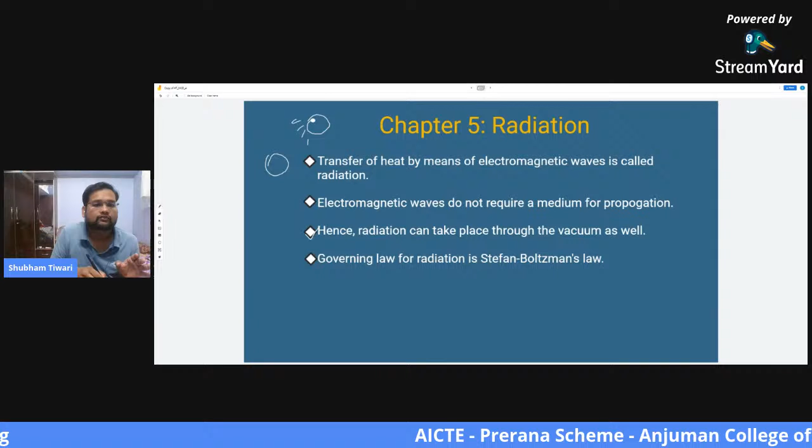What is radiation? Radiation is the transfer of heat by means of electromagnetic waves. Electromagnetic waves are not mechanical waves like sound waves. Sound waves need a medium to propagate and have different speeds in different mediums. However, electromagnetic waves do not require any medium to propagate. Hence, radiation heat transfer is the only mode that can take place through vacuum, and this is the mode of heat transfer responsible for propagation of heat from sun to earth.

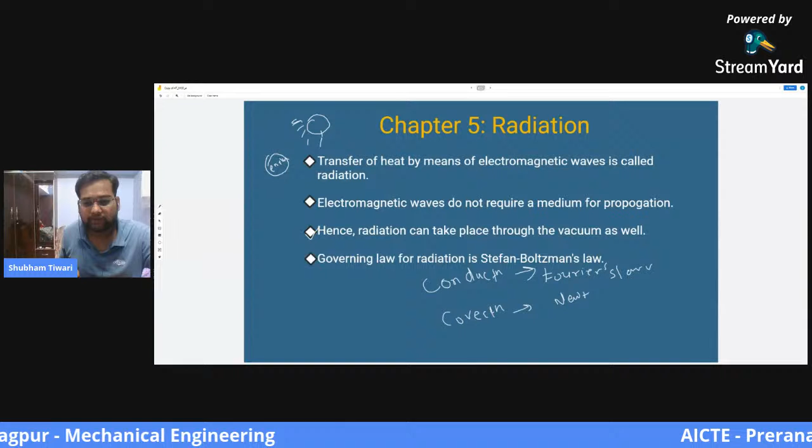For conduction, it was Fourier's law. For convection, we had Newton's law, and for radiation there is a law called Stefan-Boltzmann's law. So let us start the study of radiation with its governing law.

The Stefan-Boltzmann law states that the radiation energy emitted from the surface of a black body per unit time per unit area - heat energy is what we are mostly concerned with in heat transfer - per unit time per unit area, measured in joule per second per meter square, is a quantity known as emissive power.

Why do we need emissive power in the first place? Because let's suppose we are talking about the sun. Sun is a very huge entity, so it has a big surface area. We won't be receiving energy from all of its surface area; the earth may receive from a particular surface area. So what we need is an average value of how much the sun is emitting from over a distributed surface.

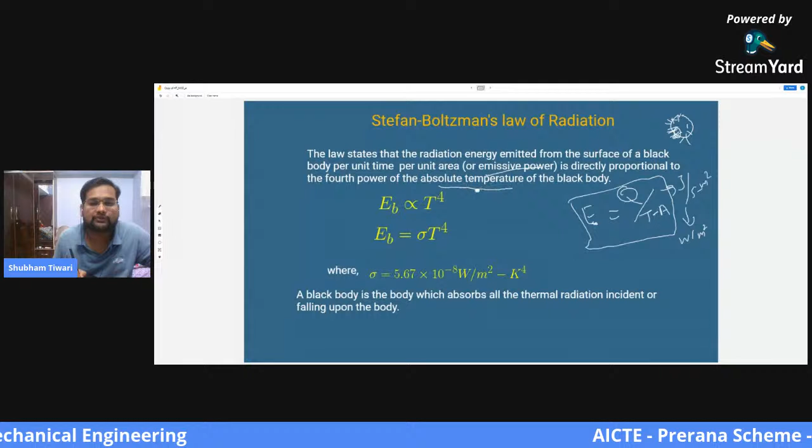The Stefan-Boltzmann law says that the emissive power of a black body - I will explain what a black body is, as we have studied this in school - is directly proportional to the fourth power of the absolute temperature. Absolute temperature is temperature measured in Kelvin. So EB is directly proportional to T to the power 4, where T is measured in Kelvin.

To remove the sign of proportionality, we introduce a constant of proportionality, sigma, known as Stefan-Boltzmann's constant. Its value is 5.67 into 10 raised to power minus 8. By rearranging, we find its unit is E upon T to the power 4. Since the unit of E is watt per meter square, the unit becomes watt per meter square Kelvin to the power 4. So Stefan-Boltzmann constant has a value of 5.67 into 10 raised to power minus 8 watt per meter square Kelvin to the power 4.

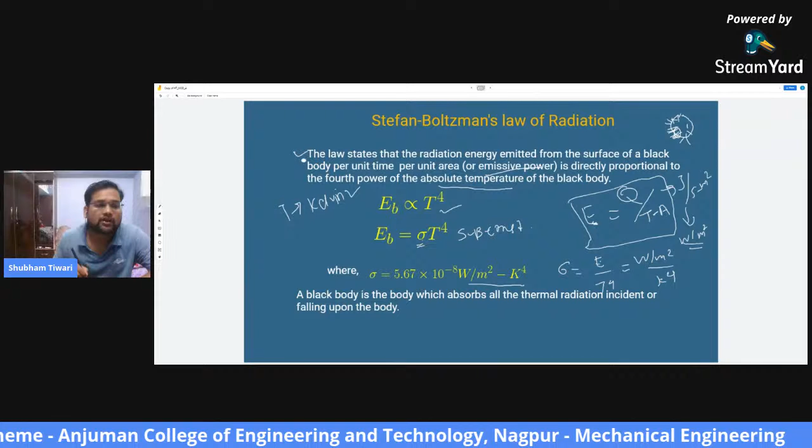Now, what is a black body? We came across this terminology. Suppose I have a body here, and some amount of heat energy is incident upon this body. If this body absorbs all this heat energy, then this body is known as a black body, or a perfectly black body. A black body is a body which absorbs all the thermal radiation incident or falling upon it.

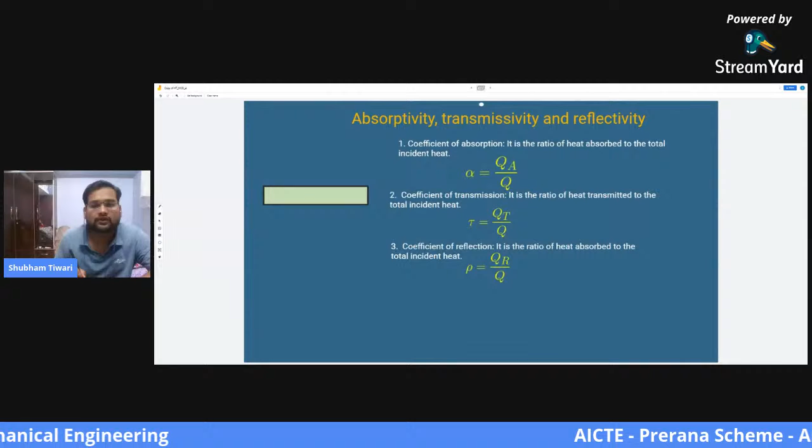Now we have to look at some terminologies, including absorptivity, transmissivity, and reflectivity. Suppose I have a body here, and some amount of heat is incident on this body. Q is the total amount of incident energy.

Incident radiation, heat radiation, or thermal radiation - terminology is quite mixed up, so don't get confused by whatever we are talking about. Radiation is thermal radiation, which is nothing but the heat energy that has been radiated.

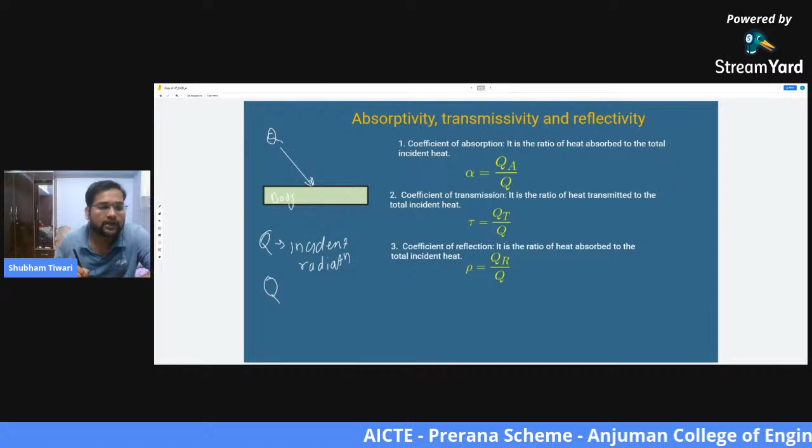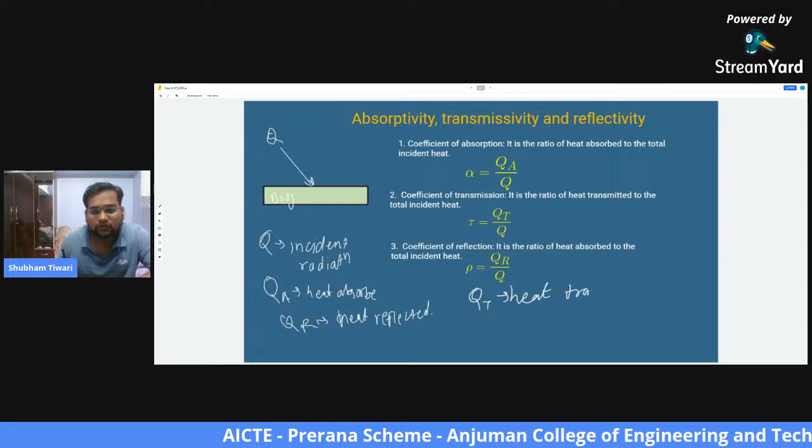QA is the amount of heat absorbed. QR is the amount of heat reflected. And QT is the amount of heat transmitted.

Now what happens to this body? Some amount of heat energy is absorbed within the body - that is QA. Some amount of energy is allowed to transmit through itself - that is QT. And the remaining amount is reflected. So when total amount Q of incident heat radiation falls upon this body, some of it is absorbed, some of it is reflected, and some of it is transmitted.

So let us keep this in mind and jump to this terminology. The very first terminology here is coefficient of absorption. What does it say? It is the ratio of amount of energy absorbed to the total incident energy. So let's say if the incident energy was 100 watts, and this body absorbed 60 watts of energy, then alpha will be 60 upon 100, and its value will be 0.6.

Now coefficient of transmission - it is the ratio of amount of heat transmitted to the total incident heat. If incident heat was 100 watts, absorbed heat was 60 watts, and transmitted heat was, let's say, 10 watts, then it will be 10 upon 100, which equals 0.1. The value of tau here will be 0.1.

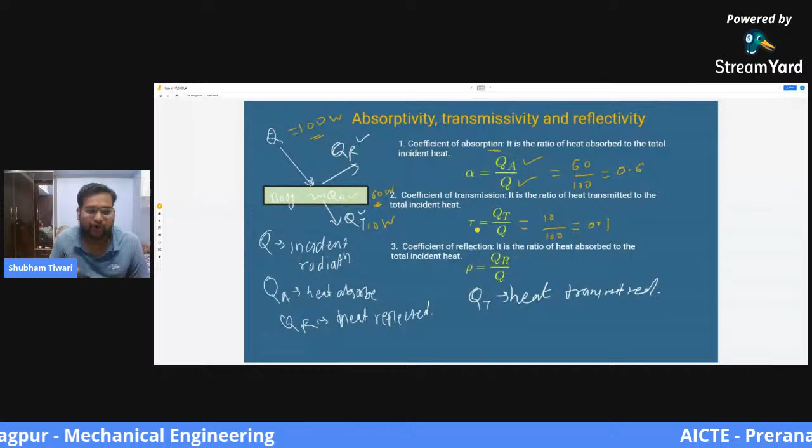Now again we have QR, the amount of heat that is reflected. So out of 100 watts, 60 watts was absorbed, 10 watts was transmitted, so the remaining 30 watts is reflected. So amount of energy reflected divided by total incident energy is 0.3. This is coefficient of reflection. It is very easy to remember - if you just remember these equations, you can easily recall its definition.

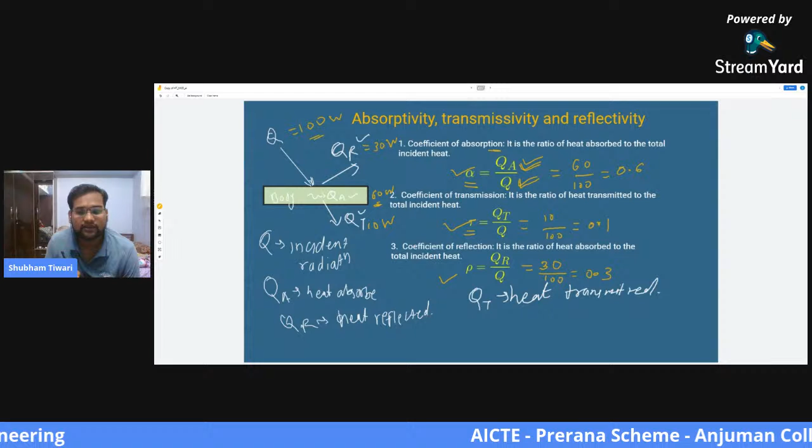Alpha is the ratio of heat energy absorbed by the body to the total heat energy incident on the body. Transmissivity, or coefficient of transmission, is the ratio of amount of heat transmitted to the total amount of heat incident on the body. Reflectivity is the amount of heat reflected to the total amount of heat incident on the body.

So let us just move further and continue this discussion about these coefficients.

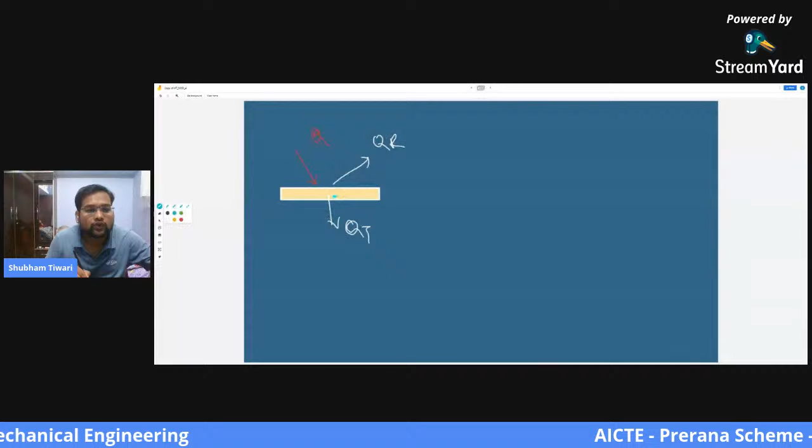So as I told you, Q is the amount of heat that has been incident on this body. QR is reflected. QT is transmitted - the amount of heat transmitted. And QA is absorbed within this body.

So total energy equals energy absorbed by the body plus energy reflected by the body plus energy transmitted by the body. Now what I will do is divide the above equation by Q itself. By rearranging, I can write QA upon Q plus QR upon Q plus QT upon Q equals Q upon Q.

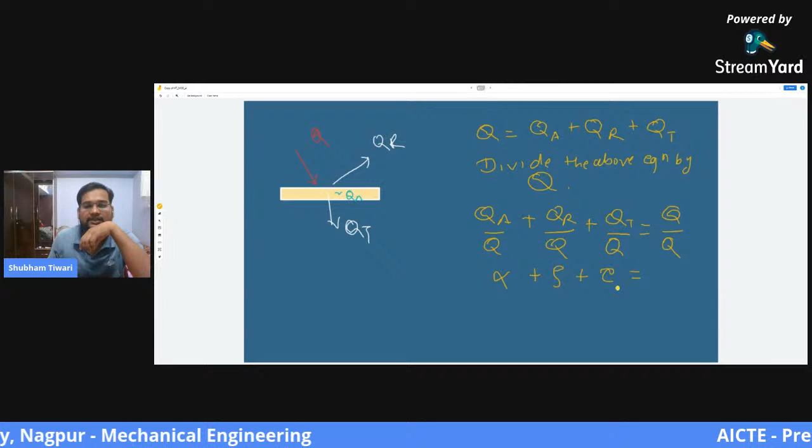What is QA upon Q? If you decipher this equation, it is heat absorbed upon total heat, that is absorptivity. Heat reflected upon total heat, that is reflectivity. Heat transmitted upon total heat, that is transmissivity. And what is Q upon Q? It is 1. So this is a very important equation we have achieved: the summation of all these coefficients - coefficient of absorption, reflectivity, and tau - equals 1.

Let us now check this equation with various cases. What is our equation? Alpha plus rho plus tau equals 1.

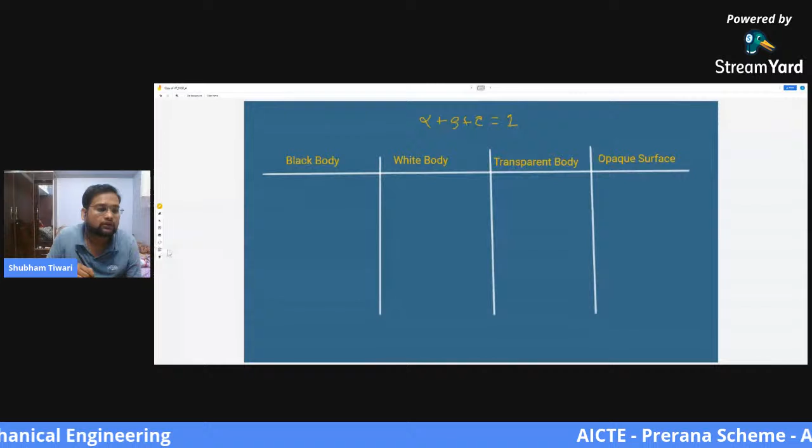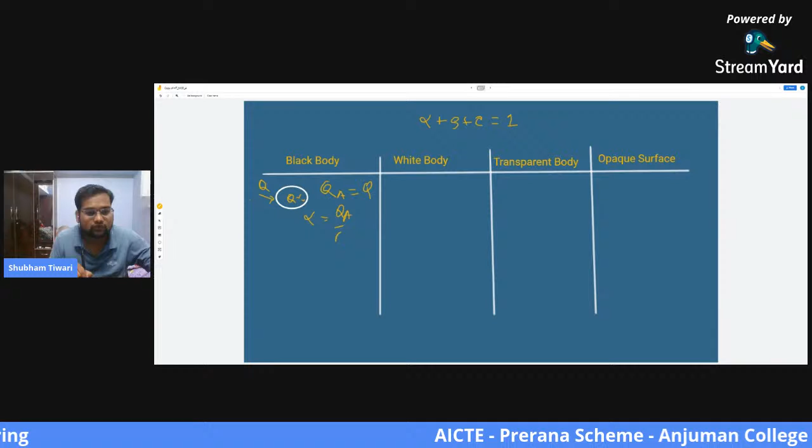First let us see black body. What will a black body do? If Q is the amount of energy incident on it, it will absorb all the energy within it. So we can say QA equals Q. So alpha, which is QA upon Q, becomes 1. If alpha equals 1, then in this equation alpha plus rho plus tau, we can say rho equals 0 and tau equals 0, because their combined summation should equal 1. Since alpha takes the value 1, the remaining two will have value 0, as they can never have a negative value.

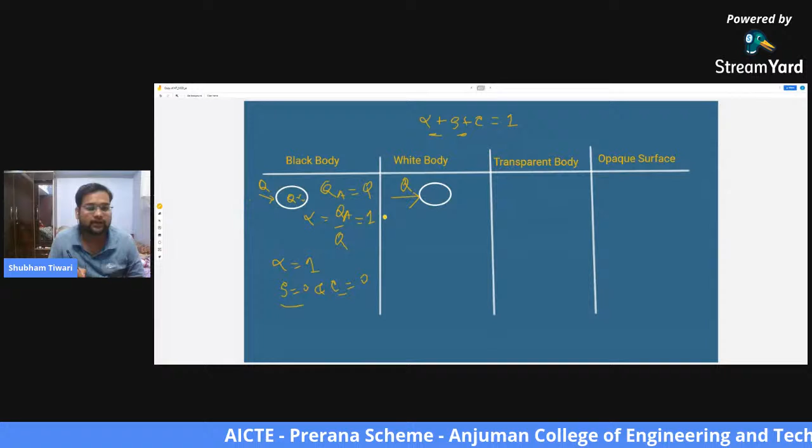Now let us see what happens with white body. When Q amount of heat is incident upon it, what this white body will do is reflect the same total amount of energy that is equal to the incident energy. That is, we can say QR equals Q. Now rho is QR upon Q, which equals 1. Since rho takes this value, from this equation we can say alpha equals 0 and tau equals 0.

Now let us move toward the next term, that is transparent body.

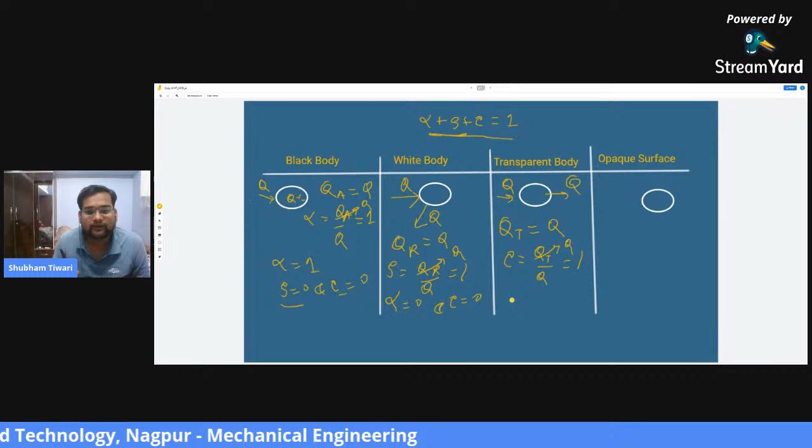Now in a transparent body which is not absorbing any heat, we can say that if Q amount of heat is incident upon it, then the same amount of energy will be transmitted through it. So Qt equals Q, and tau becomes Qt upon Q equals 1. So the remaining values of alpha and rho will be equal to 0.

Now let us see what an opaque surface is. An opaque surface is a surface which won't transmit any heat, that is Qt equals 0 in this case. So the energy is either reflected or absorbed by the body. So Qt equals 0 means tau, that is Qt upon Q, equals 0. So from equation 1 we can write alpha plus rho equals 1. This was the discussion about different types of bodies that we come across in radiation heat transfer.

Now, Planck's law of thermal radiation. This is a law related to the nature of waves. One must remember that this heat transfer is special because it takes place by means of electromagnetic waves. Since we are talking about waves, there will be terminologies like wavelength, amplitude, etc. that come into play when talking about this type of heat transfer.

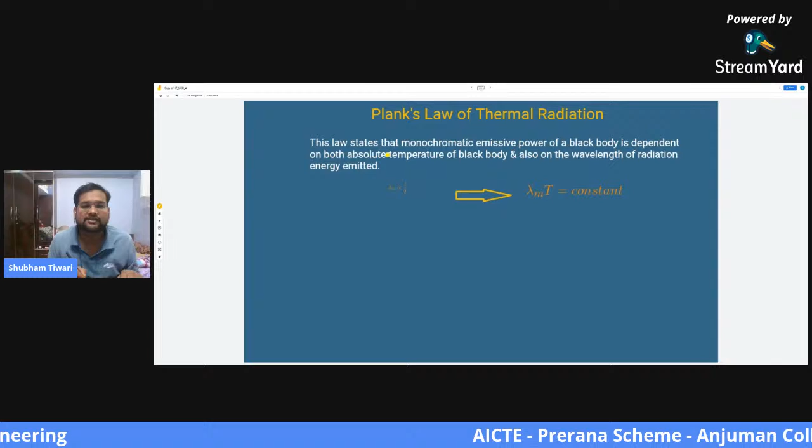So what does this law state? Let us quickly read it. This law states that the monochromatic emissive power of a black body is dependent on both the absolute temperature of the black body and also on the wavelength of radiation energy emitted.

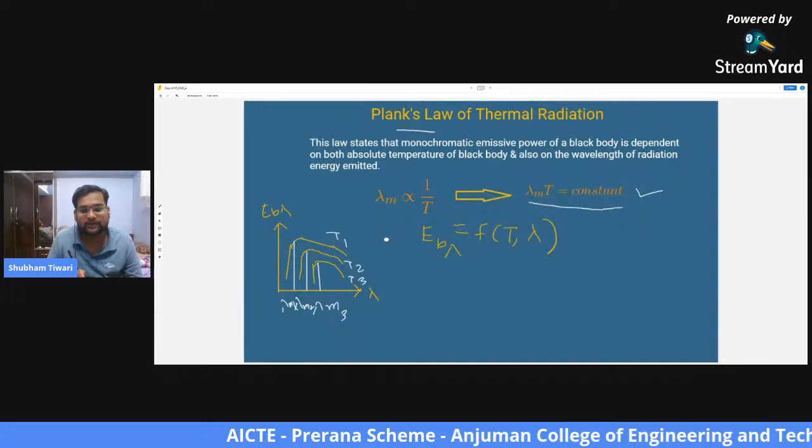What is the importance, and if you want to remember it, what you have to remember is just this statement, just this expression: that EB lambda is a function of absolute temperature and wavelength.

Now, emissivity. There is this term known as emissivity. Emissivity of a body is defined as the ratio of the emissive power of a body to the emissive power of a black body.

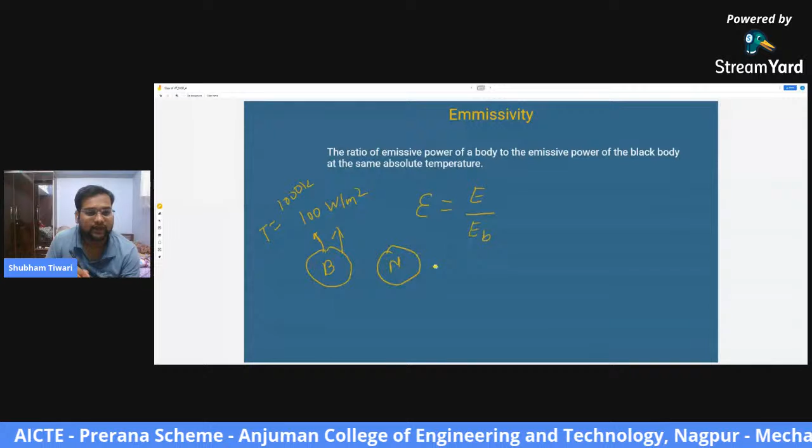Let us understand this with two bodies: one is a black body, one is a normal body. This body has an emissive power of 100 watt per meter square, at a temperature of let's say 1000 Kelvin, which is just an assumption, not the exact value. At the same temperature, the normal body has an emissive power of 70 watt per meter square.

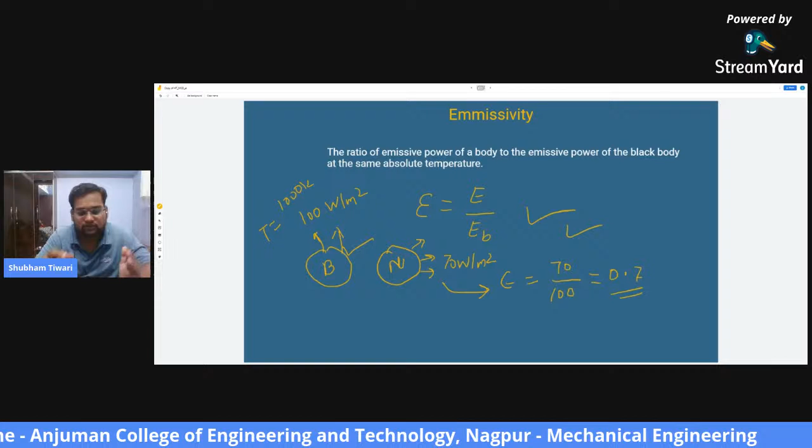So what is the purpose of emissivity? Emissivity is nothing but a standard of comparison. So in any case, when we need to evaluate something, we have to set a benchmark for comparison. Black body is that benchmark which we compare any body with. So emissive power of any body can be compared with the emissive power of a black body by means of emissivity.

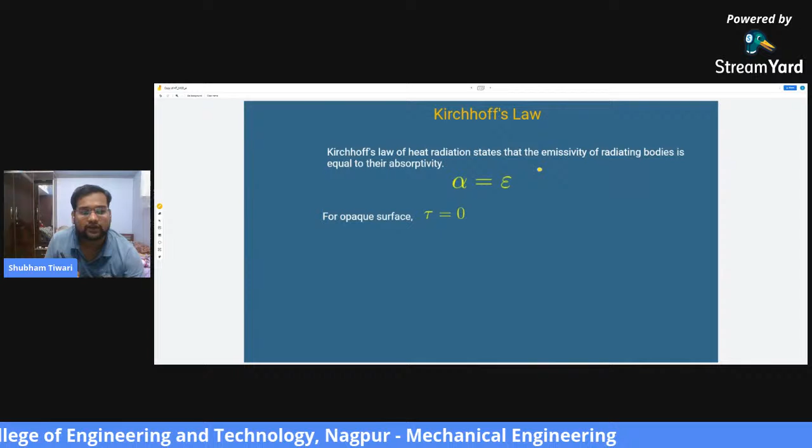Now, another law in this radiation chapter that we have also studied in school is Kirchhoff's law. Kirchhoff's law of heat radiation states that the emissivity of radiating bodies is equal to their absorptivity. So for a radiating body, their absorptivity equals their emissivity, that is, alpha equals epsilon.

Now under the light of this law, what will happen to an opaque surface? We know that for an opaque surface, transmittivity is 0, so the energy will only be reflected and absorbed. So we can say alpha plus rho plus tau equals 1. This is our equation. Now tau is 0, so alpha plus rho equals 1. Now rho equals 1 minus alpha.

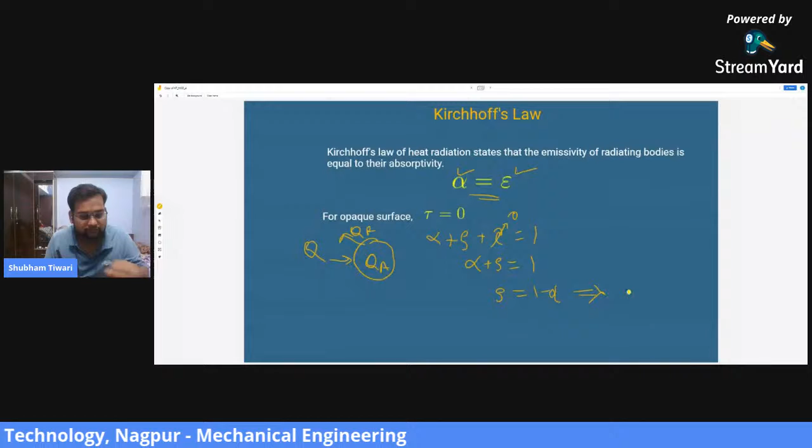Using the same thing, we can say that this alpha equals epsilon, the emissivity. So rho is 1 minus emissivity. So this is Kirchhoff's law, and this is what we can derive from it.

Now moving forward, with those... this question gets asked in the exam. It has been asked.

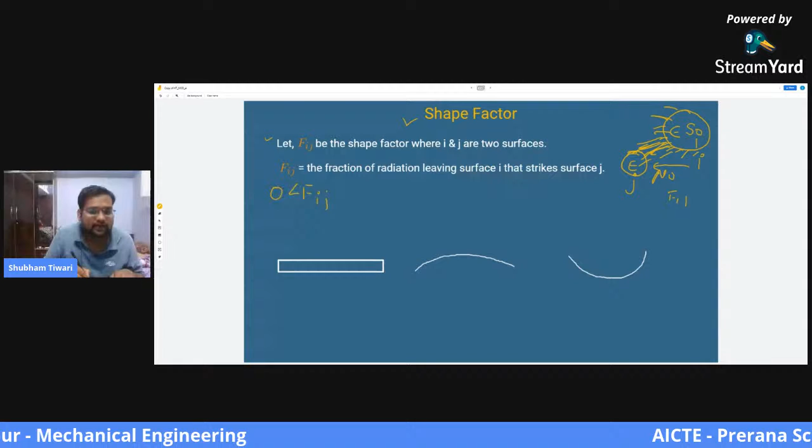Greater than or equal to 0 and less than or equal to 1. So this is what we have to understand. Let us see some cases.

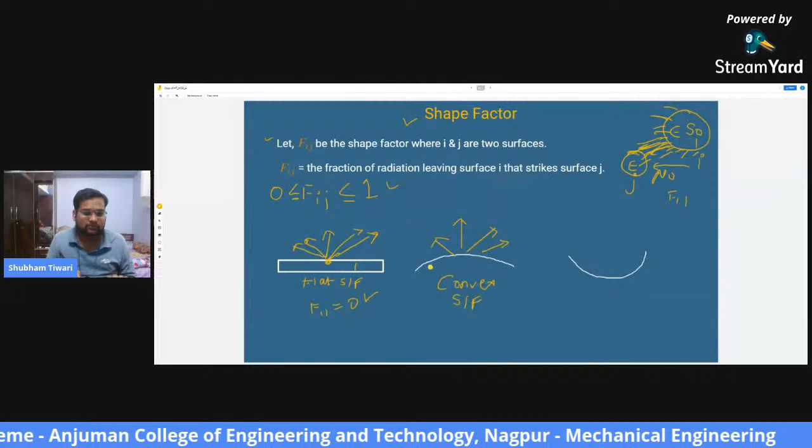While this is our concave surface. Here, whatever energy is leaving, some amount of it can strike back onto this same surface. So there is a possibility that some amount of energy will come back to its own surface that has been emitted from itself. So if this is surface 1, then we can say F11 is not equal to 0.

However, in the convex case, no energy emitting from this surface will ever come back to this surface only. So we can say that here also F11 equals 0. So for flat surface F11 is 0, for convex surface F11 is 0, and for concave surface F11 is not equal to 0.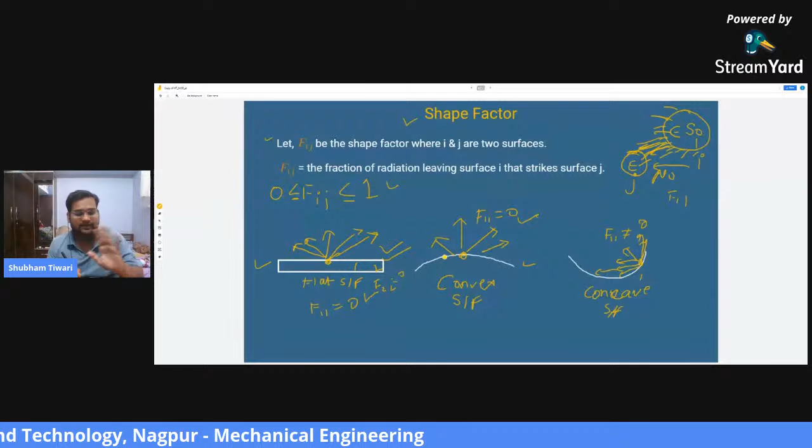I just want you to remember these three terms. This can be surface 2. If this is named surface 2, then F22 equals to 0. So 11 and 22 are just naming - just remember the nature of shape. A flat shape won't have incident energy that strikes on it that has left from its own surface. So for flat, that does not happen. For convex, that does not happen. However, for concave, there is a possibility.

Now there are some rules that are related to the shape factor. This is our surface number 1, this is our surface number 2, and this is our surface number 3.

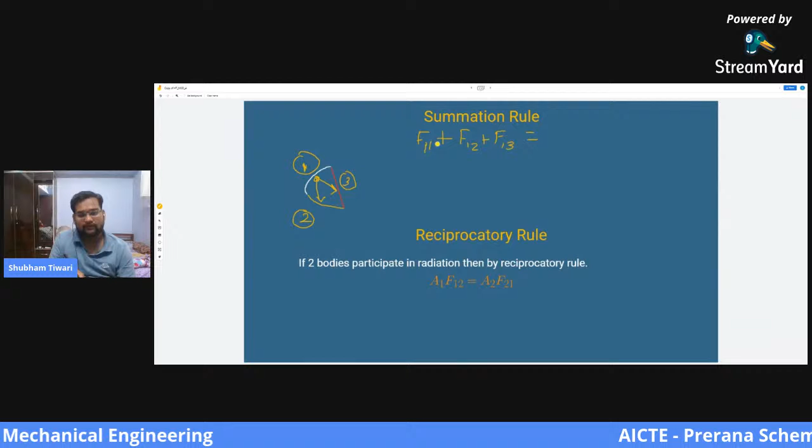F11 is the fraction of radiation leaving from 1 and striking 1, plus F12 is the amount of radiation leaving 1 striking 2, plus F13 is the amount of radiation leaving surface 1 striking surface 3. Since all of these are factors with values less than 1, for one surface their summation value will be equal to 1. This is for surface 1.

Similarly, for the second surface: leaving from 2 striking 1, plus leaving from 2 striking 2, plus energy leaving from 2 striking 3, is equal to 1 for surface number 2. What will be for surface 3?

According to the summation rule, we can write F31, the amount of energy emitted from 3 striking on 1, plus the amount of energy emitted from 3 striking on 2 is F32, plus the amount of energy emitted from 3 and striking 3 is F33, equals to 1. So we have written this for each and every surface. For every surface, the summation of all such shape factors will be equal to 1.

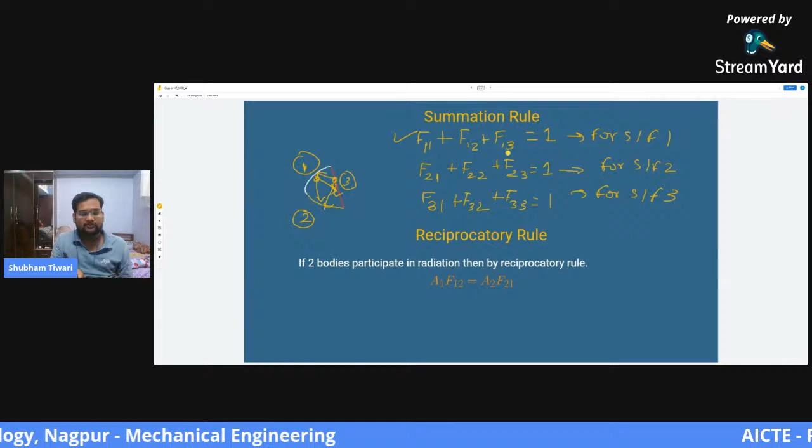So there are 3 bodies, so we have three shape factors for each surface. Keep this in mind.

Now the reciprocity rule. What is the reciprocity rule? Let's say we have two surfaces in contact with each other, surface 1 and surface 2. If two bodies participate in radiation, then by the reciprocity rule, this body has area A1 and this surface has area A2. According to the reciprocity rule, A1 into F12 is equal to A2 into F21.

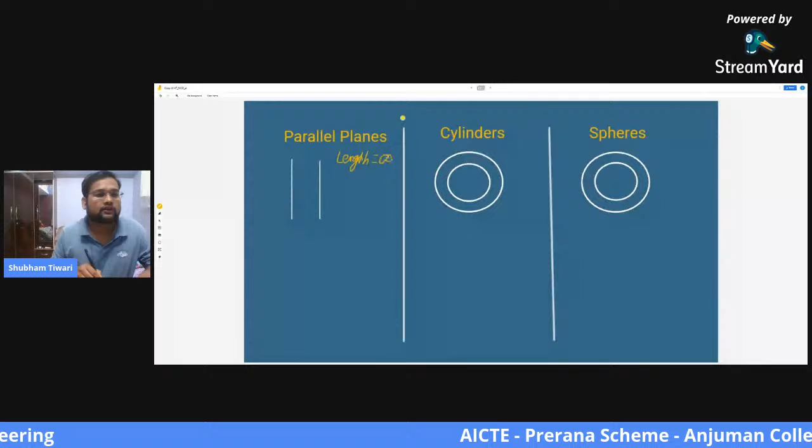Now we have here what is known as parallel planes. These parallel planes have length equal to infinity, infinite length. Now what happens here is, as I told you, this is a flat surface. This is surface 1, this is surface 2. For this surface, we can write F11 equals to 0. For this surface, we can write F22 equals to 0.

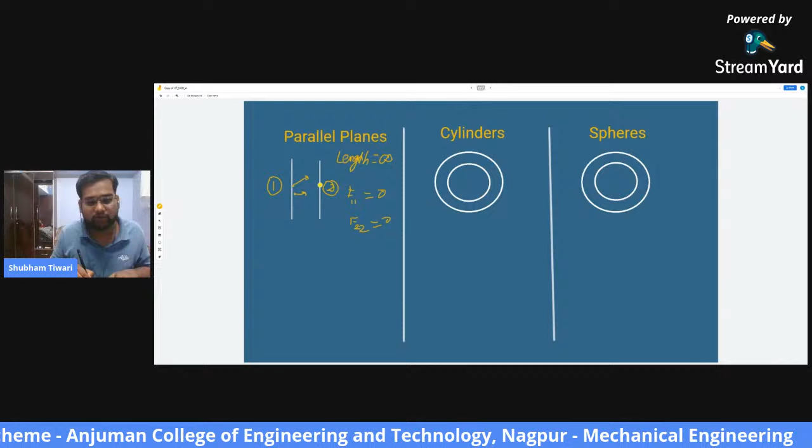So by summation rule, F11 plus F22 is equal to 1.

Sorry, once again. By summation rule for the first surface, F11 plus F12 equals to 1. Now F11 is 0, so F12 is 1.

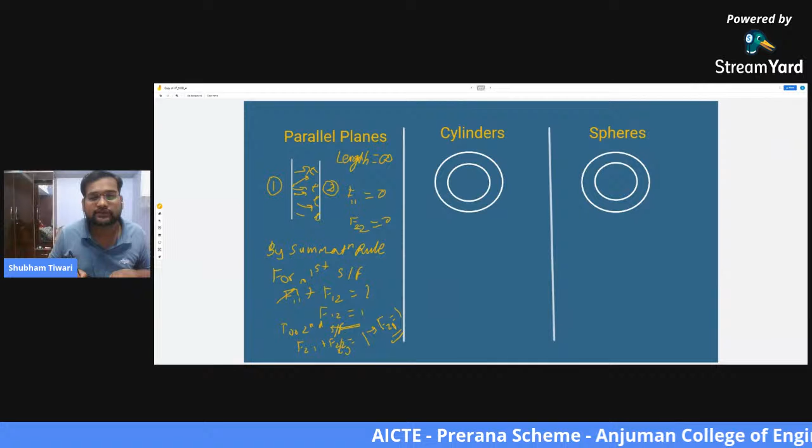Similarly, we have now these two cylinders, cylinder 1 and cylinder 2. These cylinders have the same length, L1 equals L2. Now what happens in this case is, for cylinder 1, this is a convex surface. So for 1, we can write F11 equals to 0, since 1 is convex.

So by summation rule, F11 plus F12 is equal to 1. This term is 0, so what we have is F12 is equal to 1.

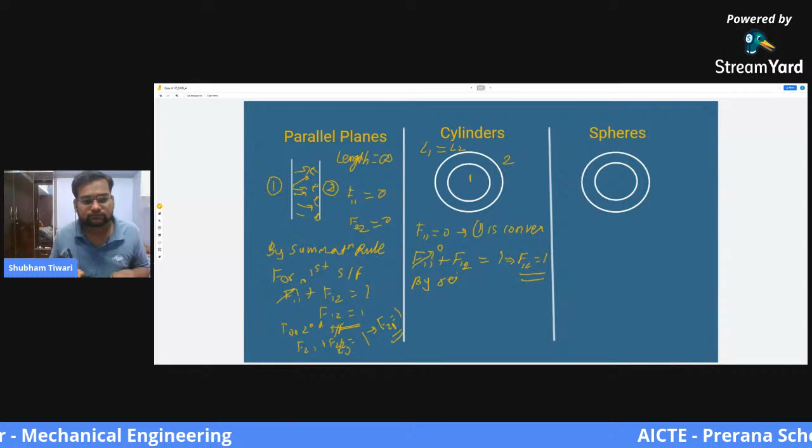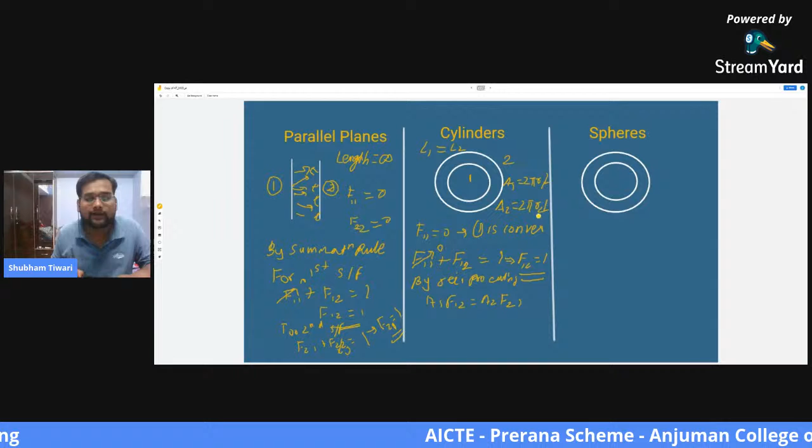Now, by the reciprocity rule, A1 F12 is equal to A2 F21. What is A1? A1 is 2 pi R1 into L. A2 is 2 pi R2 into L. So this is about A1 and A2.

Putting this value of A1 and A2 in this equation, we get that F21 equals A1 upon A2 multiplied by F12. F12 is 1. So F21 equals A1 upon A2. LL gets cancelled, 2 pi gets cancelled, we will have R1 upon R2. So let me write it here: F21 equals R1 upon R2. By applying the summation rule, you can further solve it.

Now for these spheres, here sphere 1 has radius R1 and this sphere has radius R2. Sphere 1 has area 4 pi R1 square, and A2 has area 4 pi R2 square.

Now this is convex, so F11 is 0, which means F11 plus F12 equals 1. So F12 will be equal to 1. By the reciprocity rule, we can say...

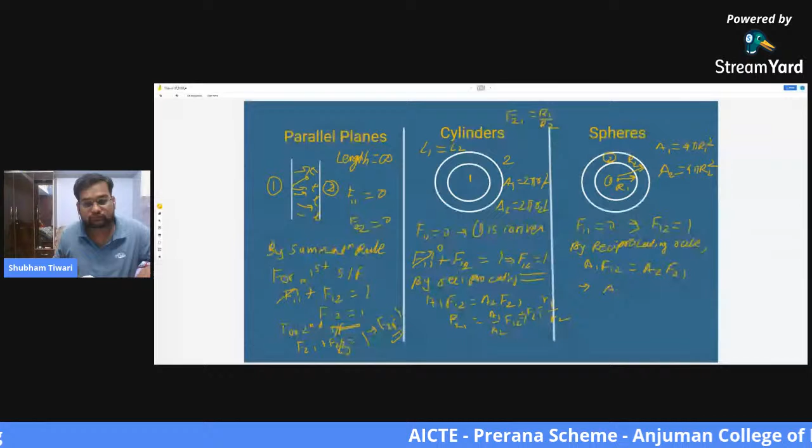A1 F12 equals A2 F21, which is what? F21 equals A1 upon A2 into F12. This value is 1. Comparing from here, 4 pi and 4 pi get cancelled. What we have remaining is F21 equals R1 square upon R2 square.

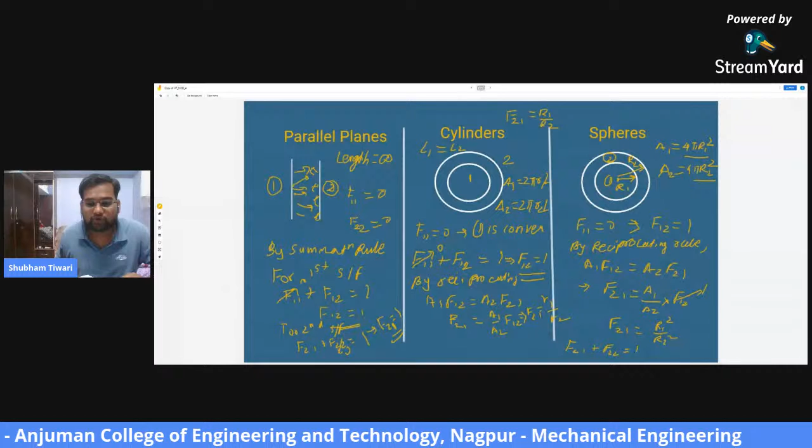Further, if you have to find F22, we can write F21 plus F22 equals 1. By the reciprocity rule, put this value in this equation and you can find the value.

Now there was a question asked on this shape factor. We have completed most of the important parts we needed to study in radiation heat transfer. So let us now check this problem. This was asked in, I think, GATE 2005.

A solid sphere of radius R1 is placed concentrically inside a hollow sphere of radius R2. So R1 is 20 mm and R2 is 30 mm.

What we have to find is the shape factor F21. Now look at this problem carefully because this gets asked and this is not what we have studied in school either.

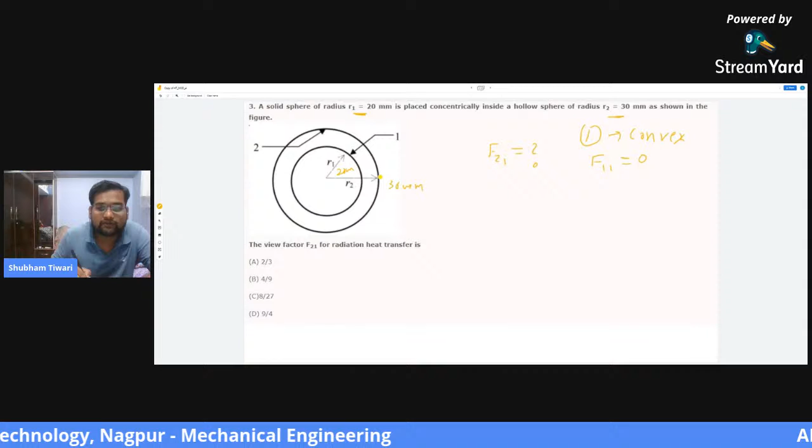So what we have, the surface 1 is convex, as we just recently solved. For a convex surface, F11 equals 0. Now F11 plus F12 equals 1. This is 0, so we can write F12 equals 1.

Again, we have the reciprocatory rule. What does it say? A1 F12 equals A2 F21. F21 is what we have to find: A1 upon A2 multiplied by F12. This is 1, so we will not be bothering about it. F21 equals 4 pi R1 square upon 4 pi R2 square. The 4 pi gets cancelled out.

F21 equals R1 square upon R2 square. So F21 is 20 by 30 whole square, which is 2 by 3 whole square, which is 4 by 9. So do we have any option like this? Yes, we have. Option B is the correct answer. So this is how we can solve it.

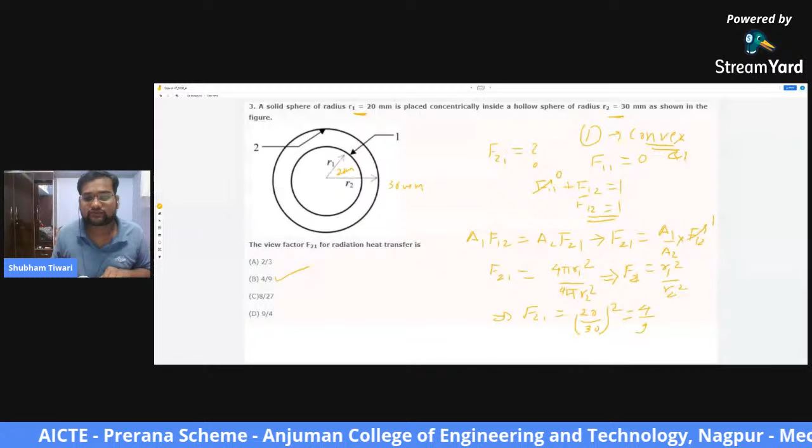What we have used: the thing I told you to remember, for convex and flat surfaces the shape factor for itself is 0. Then the summation rule, and after that the reciprocatory or reciprocating rule. So we use just these two rules and we solve this question.

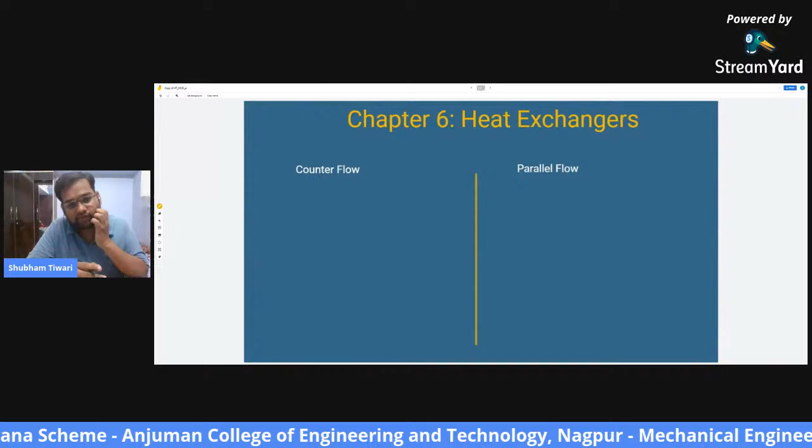So this is it for radiation. Now we have the final chapter of heat exchangers. Heat exchangers are industrial devices, industrial instruments, that are used to transfer heat from hot substance to cold substance and so on.

There are two types of heat exchangers of our particular interest: one is counterflow and another is parallel flow. Let us see counterflow. This is hot fluid, this is cold fluid. The direction of cold fluid and hot fluid is opposite.

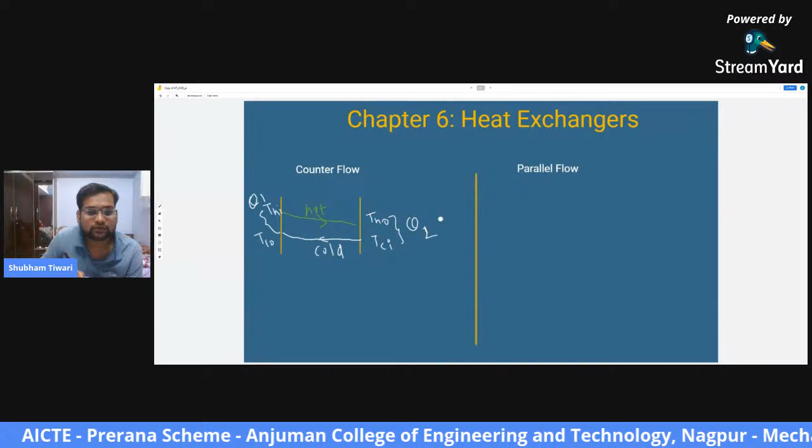This is THI, the temperature of hot fluid at inlet, and temperature of hot fluid at outlet. Temperature of cold fluid at inlet and temperature of cold fluid at outlet. THO minus TCI will be your theta 2, and THI minus TCO will be your theta 1.

Now we have parallel flow. In this heat exchanger, both fluids have the same direction of flow. This is hot fluid, this is cold fluid. This is THI, THO, TCI, TCO. Theta 1, theta 2. Theta 1 is THI minus TCI, and theta 2 is...

THO minus TCO. This theta, the temperature difference, is very important to find the logarithmic mean temperature difference, known as LMTD, whose formula is given as theta 1 minus theta 2 divided by the natural log of theta 1 by theta 2. This is a very important formula for us.

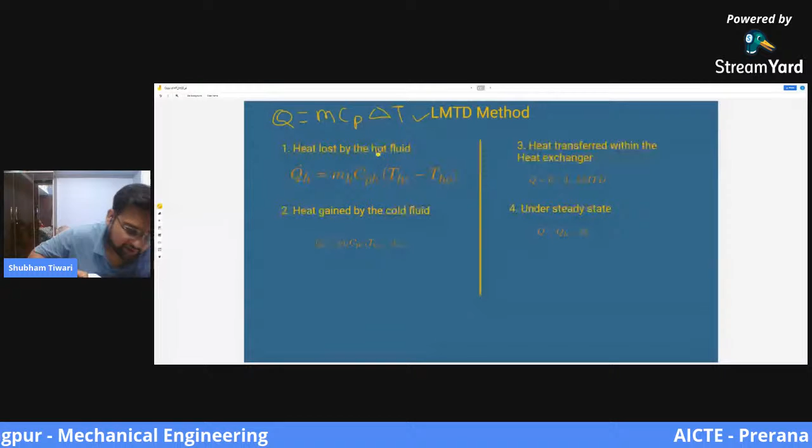Now there are some formulas that are required to memorize, and it is very logical to memorize here. See what happens in a heat exchanger: hot fluid will lose its heat, and cold fluid will gain some amount of heat. So the amount of heat lost by hot fluid is given by QH equals m dot H, Cph, into THI minus THO. This formula, mcp delta T, is pretty much used in many cases. Most of these are constant pressure processes, occurring at constant pressure.

So that is why we are using Cp. For hot fluid, the heat rejected by hot fluid is the mass flow rate of hot fluid, m dot H, multiplied by the specific heat capacity of that fluid, multiplied by the temperature difference between the inlet temperature of hot fluid and the outlet temperature of hot fluid.

Similarly, heat gained by the cold fluid is given by the same formula, m Cp delta T. You can see mcp Tc will be greater since it will absorb some heat from this. Here also it's the same case, it will absorb the heat, so its temperature will increase, that's why it is like this.

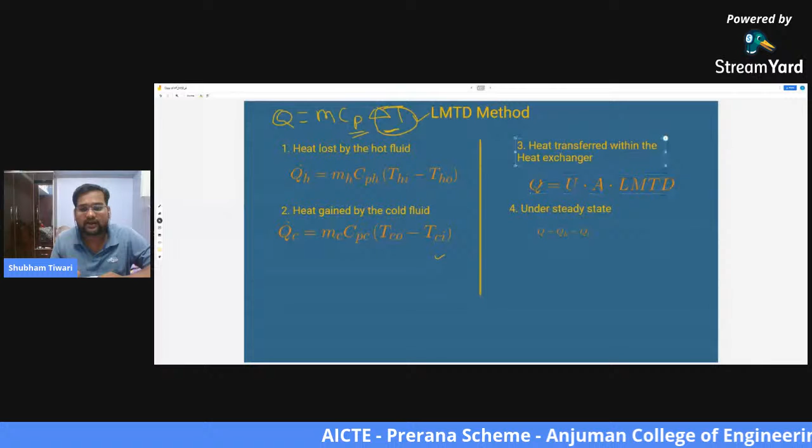And the important thing is LMTD. What is it? Q equals UA LMTD. U is your overall heat transfer coefficient, which we will look at the end of this chapter, I will explain it to you. Just remember the formula Q equals HA delta T, and try to equate it with this. H is the convective heat transfer coefficient, and U is the overall heat transfer coefficient. A is surface area, here was also surface area.

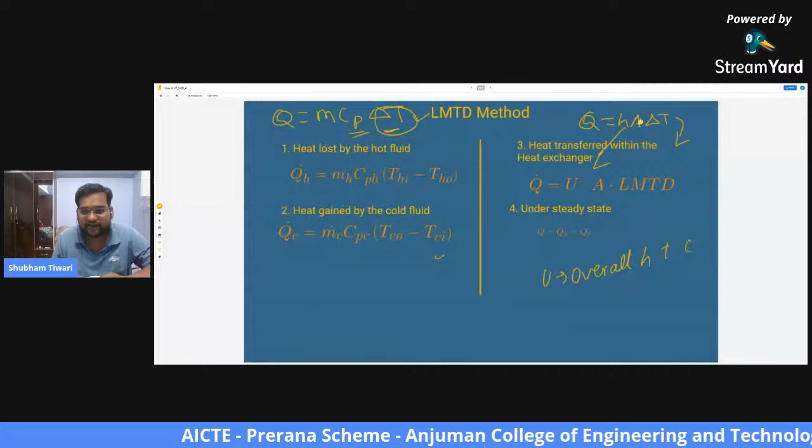Here was temperature difference, here is what? Logarithmic mean temperature difference. Why is mean taken? Because we don't have any fixed value, it is continuously changing. The value of temperature is continuously changing at each and every instant of time. Hence, we take a mean value or an average value of temperature difference.

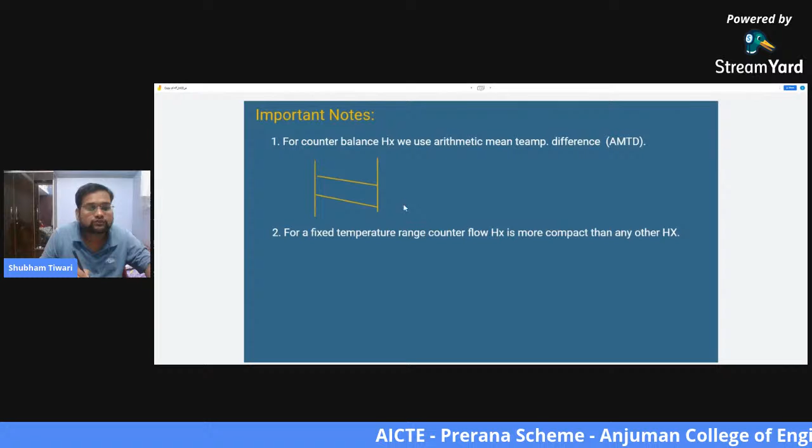So this was all about the LMTD method. Now there are some important points that I want you guys to remember. There is a thing called counter balance heat exchanger. What is a counterflow heat exchanger? Let me tell you. So this is the counterflow heat exchanger.

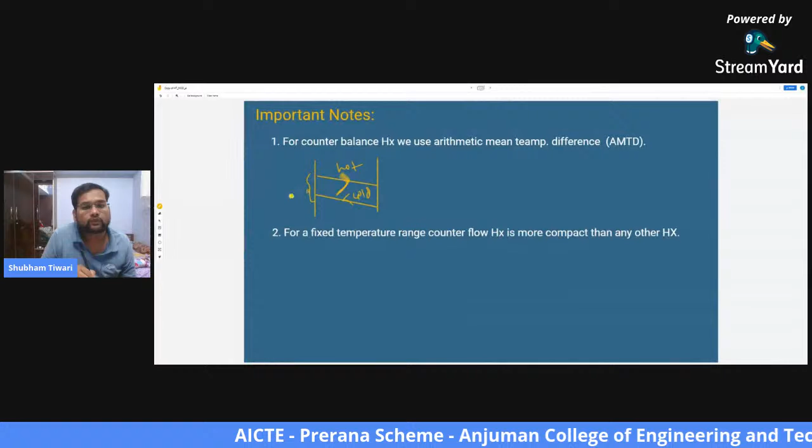This is hot fluid, this is cold fluid. In hot fluid, here the temperature difference is theta1 and here is theta2. What happens in a counter balance heat exchanger is theta1 equals theta2, these values are the same. So in this case, LMTD becomes 0, so we cannot use LMTD. Instead we use AMTD or average value. We don't even need to take AMTD, we just take this value theta because it is constant at each and every instant. So we only take the theta value. So if LMTD equals 0, we need to take this value, either theta1 or theta2, because both are going to be the same.

Now let us look at this equation. If U and Q, the overall heat transfer coefficient, and Q are kept constant, we can say that LMTD is inversely proportional to surface area, and it was found

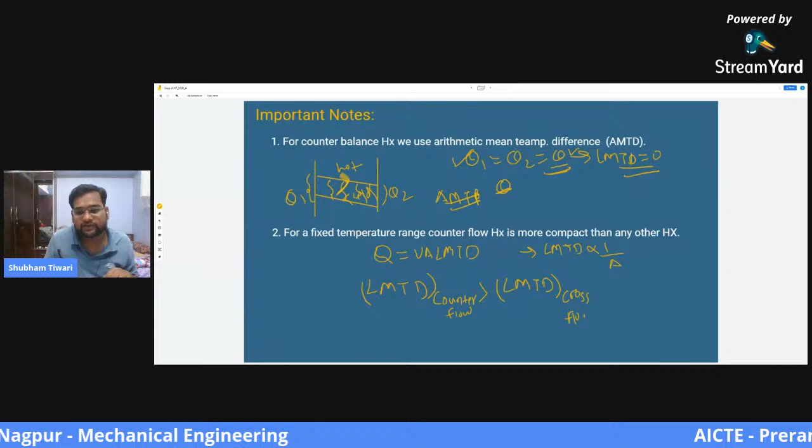that the logarithmic mean temperature difference for counterflow, this is what is practically found, LMTD for counterflow is greater than LMTD for cross flow, which is greater than LMTD of parallel flow.

Now, these values are inversely proportional, right? So LMTD is inversely proportional to your area. So what we can say is area of counterflow is less than area of cross flow, which is less than area of parallel flow.

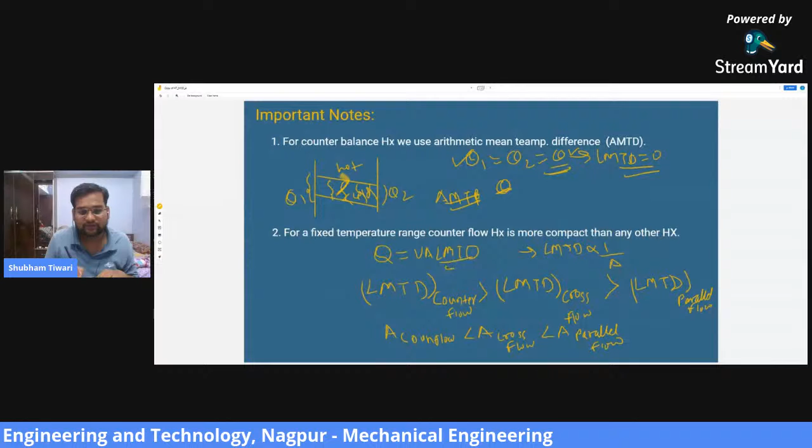So for the same temperature difference, the smallest heat exchanger that can be built is of counterflow nature. So if you are asked a question about what kind of heat exchanger you will prefer to make it more compact in a given temperature range,

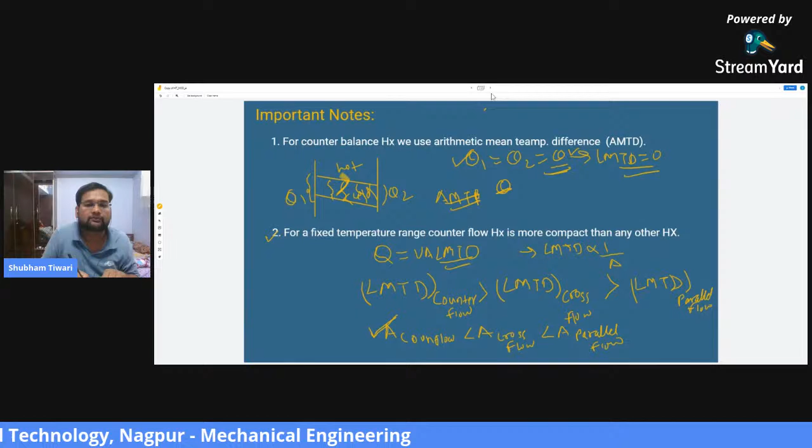What is the effectiveness of a heat exchanger? It is the ratio of actual heat transferred in the heat exchanger to the maximum heat transfer.

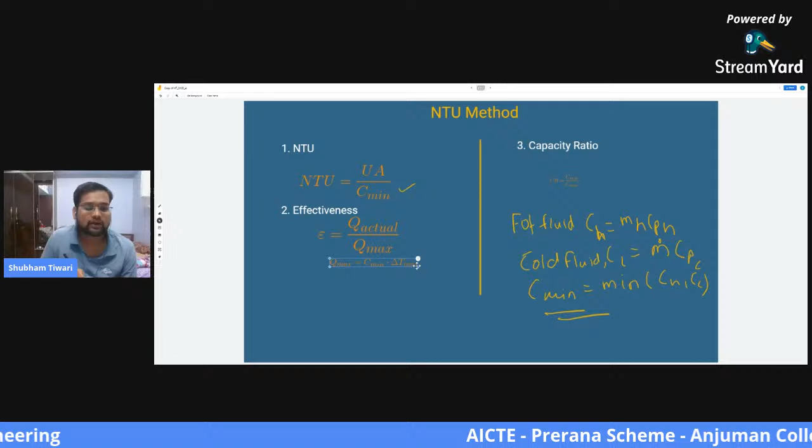Now what is maximum heat transfer? Maximum heat transfer is the product of minimum heat capacity, C minimum, multiplied by maximum temperature difference.

So in any heat exchanger, we know that THI is the maximum temperature and TCI is the minimum temperature. So delta T max will be equal to T max minus T minimum.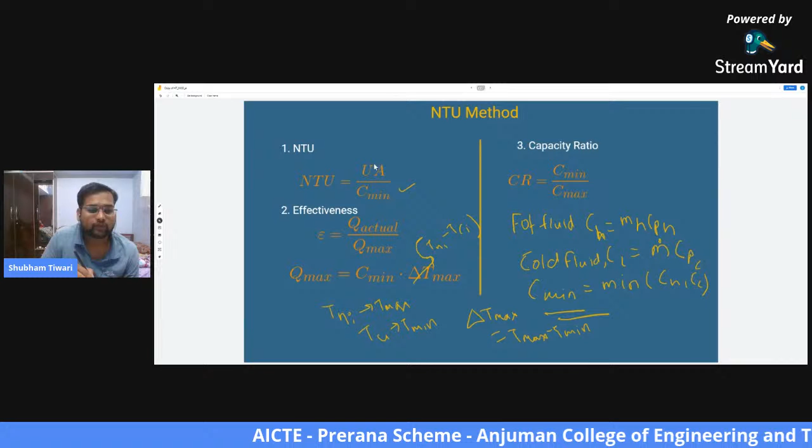The capacity ratio is the ratio of C minimum by C max. So how are we going to find C minimum? Again from this method, multiply m dot h with CPH and m dot c with CPC. Compare both values and check which is minimum. The value which is minimum is C minimum, and the value which is greater is C maximum.

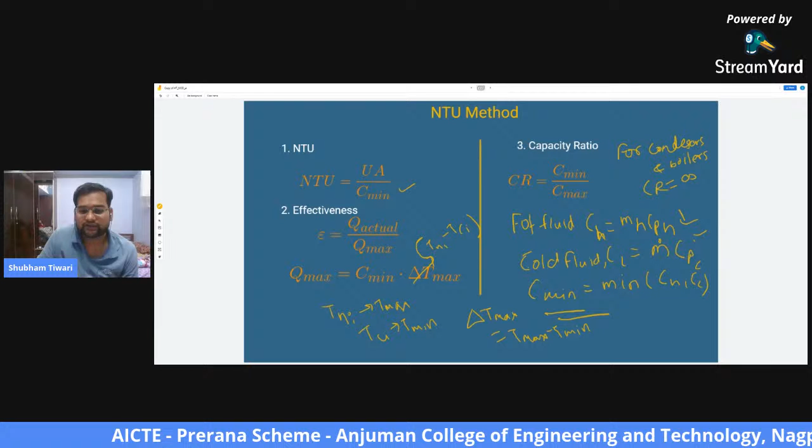For condensers and boilers, CR is infinity. So the capacity ratio is infinite.

Now I promised you that I will tell you about overall heat transfer coefficient. So first of all, let us have a look here in this session, and first focus our concentration on this point.

There is a fluid inside the tube; it has heat transfer coefficient Hi. The tube is made up of material which has thermal conductivity K, and the outside fluid has HO as its heat transfer coefficient. So the equivalent circuit we can build.

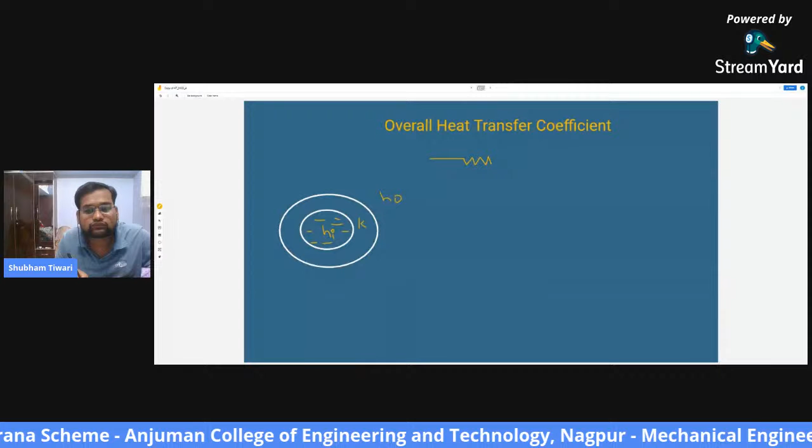The equivalent circuit will be like this. Sorry, one more resistance is there.

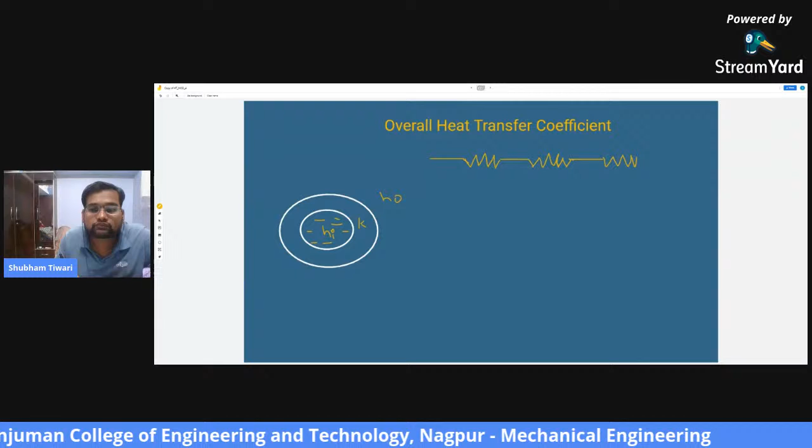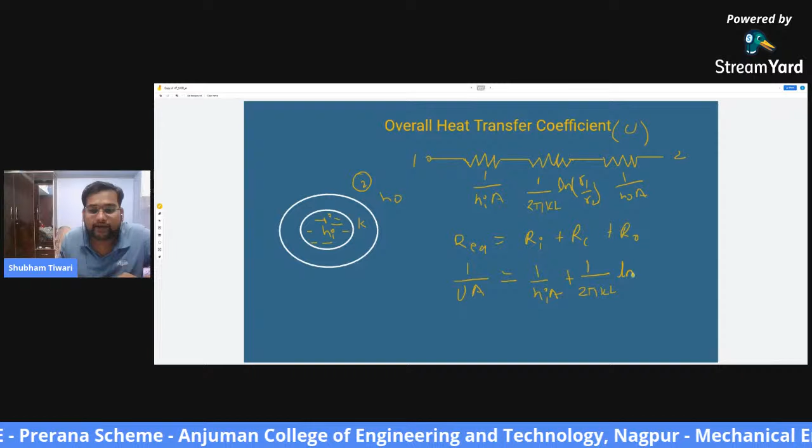So the R equivalent is Ri plus R conduction plus Ro. So R equivalent can be written as 1 upon U into A, where U is the overall heat transfer coefficient: 1 upon Hi into A plus 1 upon 2 pi KL ln of R1 by R2 plus 1 upon HO into A. So from here we can find the overall heat transfer coefficient.

So that was all the discussion about heat exchangers. It was very short because of the time constraint we have. As I told you, it is not possible to complete this in so small a time, but still I am giving you whatever is important from the exam point of view.

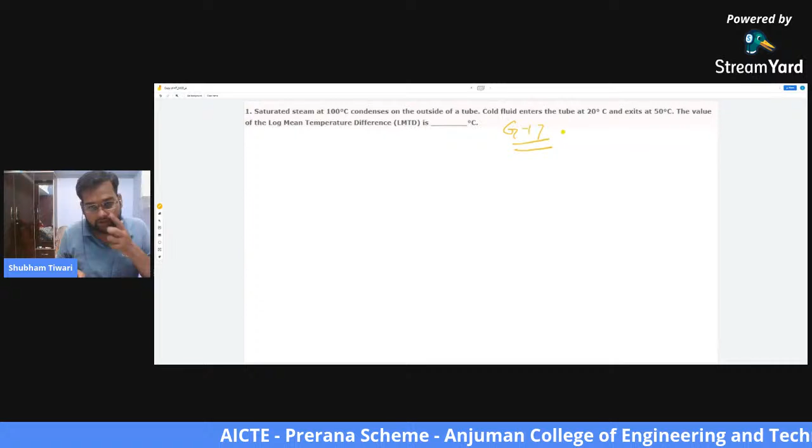This is a very important problem that was asked, I think, in GATE 2017, though I'm not sure. There is saturated steam at 100 degrees Celsius on the outside of a tube. Cold fluid enters at 20 degrees Celsius and exits at 50 degrees Celsius.

We need to find the value of LMTD. Let us draw a line diagram for it. Now let me first tell you what is the purpose of a condenser.

A condenser is also seen in our refrigerators and air conditioners. What is the purpose of this condenser?

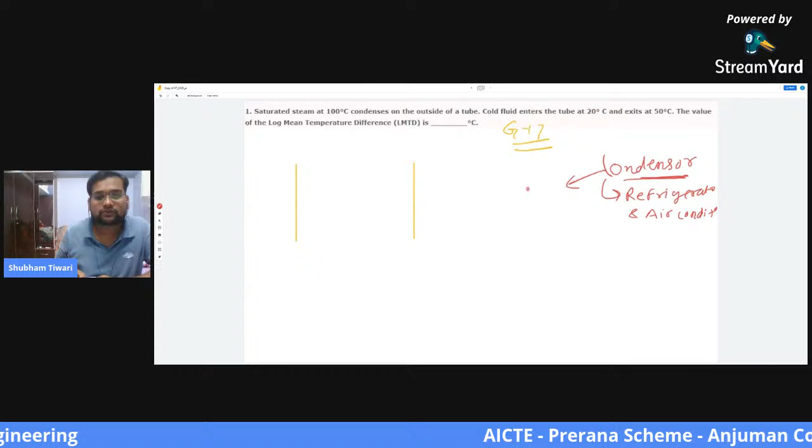The condenser helps in changing the phase of the refrigerant. If you remember this p-h diagram...

which is something like this, I will draw a rough sketch for you because I am not used to drawing on digital platforms, but still we can try.

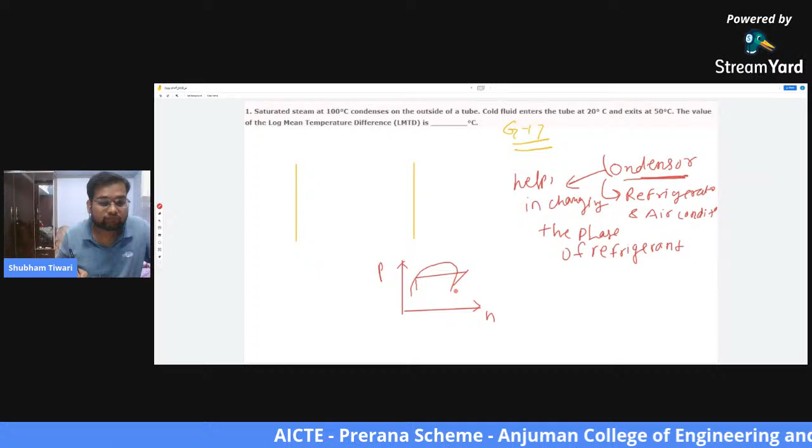So yes, 1 to 2 is for the compressor, 2 to 3 is for the condenser, 3 to 4 is the capillary or expansion valve, and here we have our evaporator. And this is the constant temperature line.

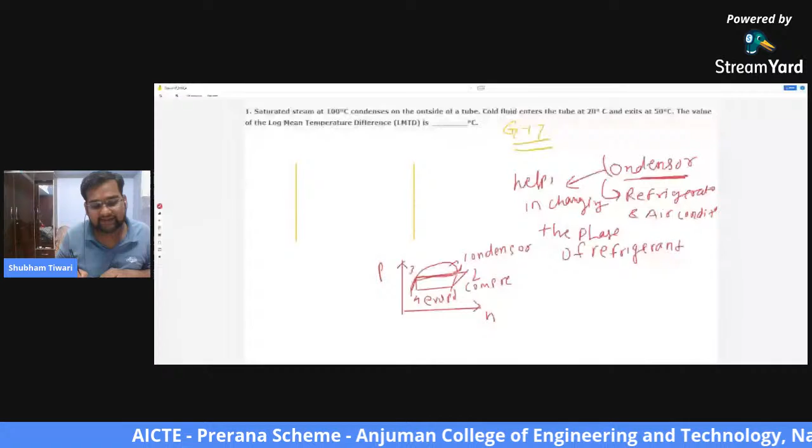So the condensation occurs at constant temperature, that is, the temperature of the hot fluid remains constant because phase change occurs at constant temperature and pressure. There is no temperature change because latent heat comes into action. So for hot fluid, we can draw this.

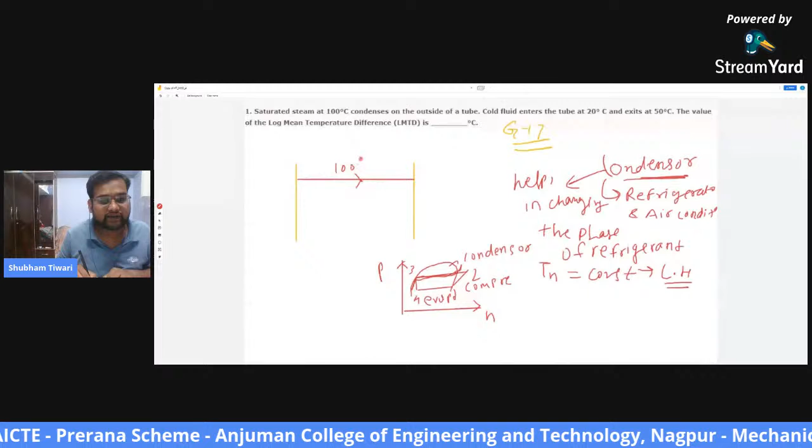THO is also equal to 100. And the cold fluid enters at 20 degrees Celsius and leaves at 50 degrees Celsius.

So theta 1 is 100 minus 20, which equals 80. Theta 2 is 100 minus 50, which is 50. So LMTD is 80 minus 50 divided by ln of 80 by 50.

So we need to use a calculator now. Let's solve this value: ln of 8 by 5. Let me just calculate here.

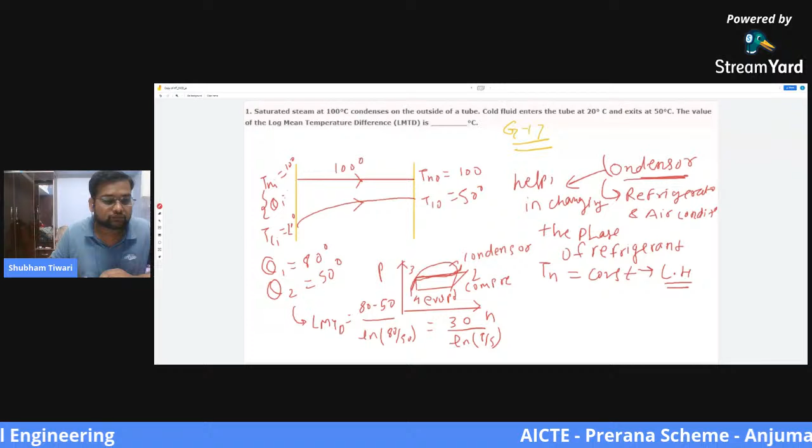So the value should come to 63.83 degrees Celsius. Check this with your own calculator also. So this is how we can solve it.

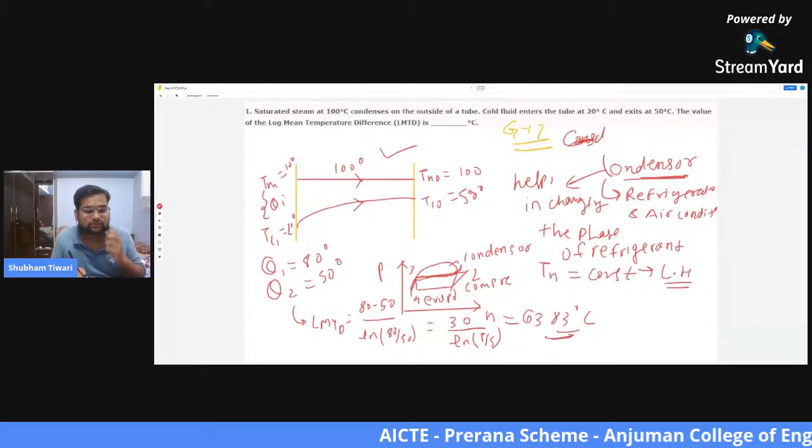This is very important for condensers and boilers. So that is it for the heat transfer session. I hope that I could provide whatever could be provided in such a limited time.